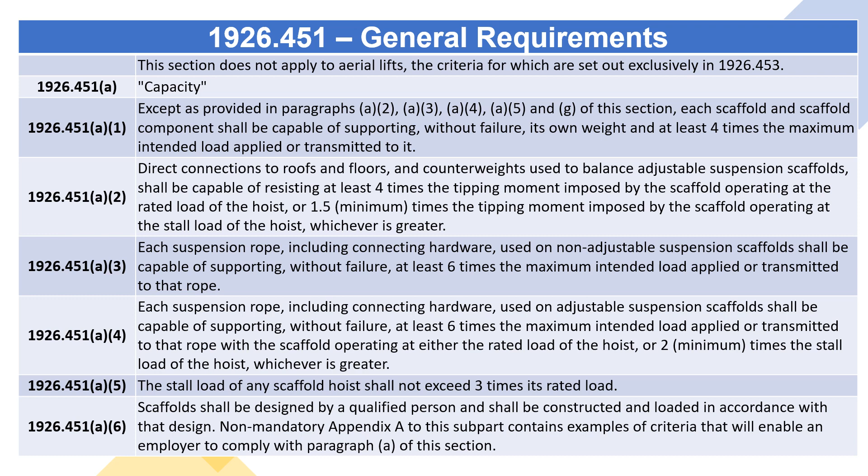1926.451 B. Scaffold platform construction. 1926.451 B1, each platform on all working levels of scaffolds shall be fully planked or decked between the front uprights and the guardrail supports as follows.

1926.451 B1 I, each platform unit, e.g., scaffold plank, fabricated deck, or fabricated platform, shall be installed so that the space between adjacent units and the space between the platform and the uprights is no more than 1 inch (2.5 centimeters) wide, except where the employer can demonstrate that a wider space is necessary, for example, to fit around uprights when side brackets are used to extend the width of the platform.

1926.451 B1 2, where the employer makes the demonstration provided for in paragraph B1 I of this section, the platform shall be planked or decked as fully as possible and the remaining open space between the platform and the upright shall not exceed 9.5 inches, 24.1 centimeters.

Exception to paragraph B1. The requirement in paragraph B1 to provide full planking or decking does not apply to platforms used solely as walkways or solely by employees performing scaffold erection or dismantling. In these situations, only the planking that the employer establishes is necessary to provide safe working conditions is required.

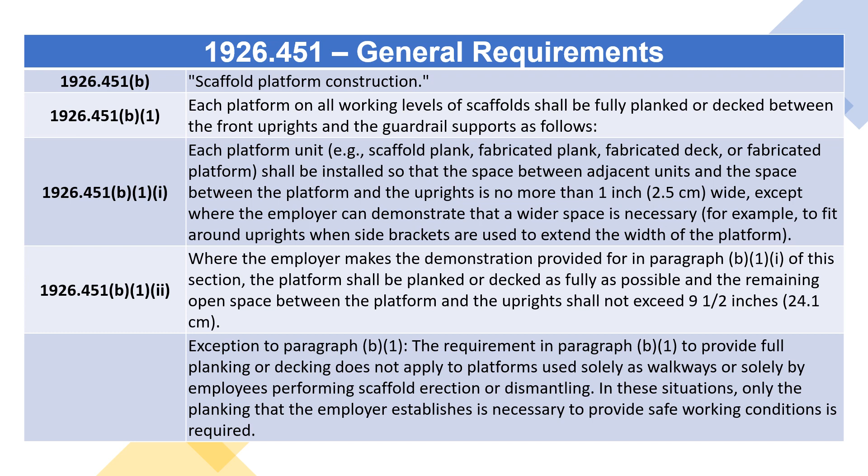1926.451 B2, except as provided in paragraphs B2 I and B2 2 of this section, each scaffold platform and walkway shall be at least 18 inches, 46 centimeters wide.

1926.451 B2 I, each ladder jack scaffold, top plate bracket scaffold, roof bracket scaffold, and pump jack scaffold shall be at least 12 inches, 30 centimeters wide. There is no minimum width requirement for boatswains' chairs.

Note to paragraph B2 I. Pursuant to an administrative stay effective November 29, 1996 and published in the Federal Register on November 25, 1996, the requirement in paragraph B2 I that roof bracket scaffolds be at least 12 inches wide is stayed until November 25, 1997 or until rulemaking regarding the minimum width of roof bracket scaffolds has been completed, whichever is later.

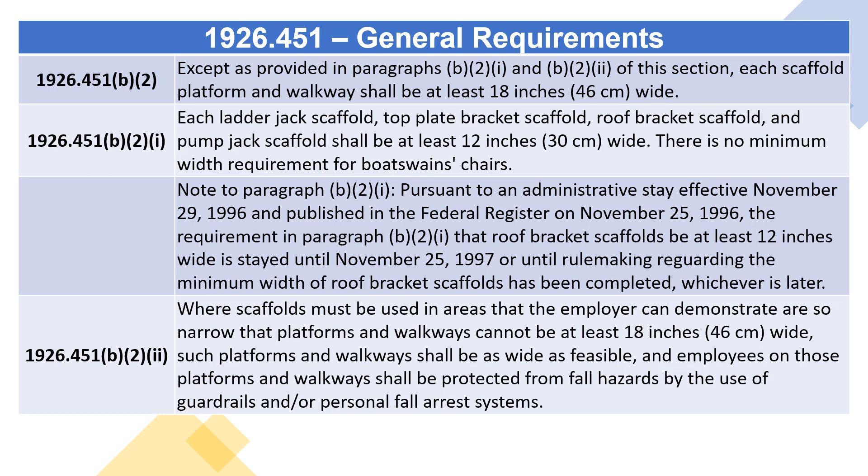1926.451 B2 2, where scaffolds must be used in areas that the employer can demonstrate are so narrow that platforms and walkways cannot be at least 18 inches, 46 centimeters wide, such platforms and walkways shall be as wide as feasible, and employees on those platforms and walkways shall be protected from fall hazards by the use of guardrails and/or personal fall arrest systems.

1926.451 B3, except as provided in paragraphs B3 I and 2 of this section, the front edge of all platforms shall not be more than 14 inches, 36 centimeters, from the face of the work, unless guardrail systems are erected along the front edge and/or personal fall arrest systems are used in accordance with paragraph G of this section to protect employees from falling.

1926.451 B3 I. The maximum distance from the face for outrigger scaffolds shall be 3 inches, 8 centimeters. 1926.451 B3 2. The maximum distance from the face for plastering and lathing operations shall be 18 inches, 46 centimeters.

1926.451(b)(4). Each end of a platform, unless cleated or otherwise restrained by hooks or equivalent means, shall extend over the centerline of its support at least 6 inches (15 centimeters).

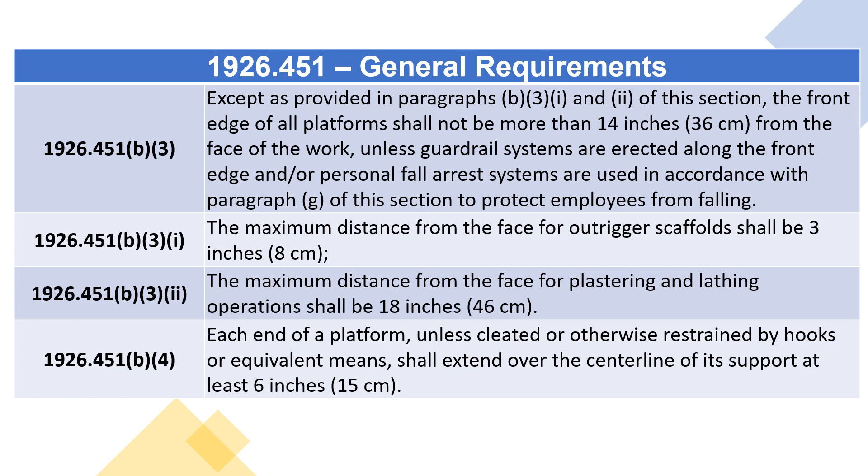1926.451(b)(5)(i). Each end of a platform 10 feet or less in length shall not extend over its support more than 12 inches (30 centimeters), unless the platform is designed and installed so that the cantilevered portion is able to support employees and/or materials without tipping, or has guardrails which block employee access to the cantilevered end.

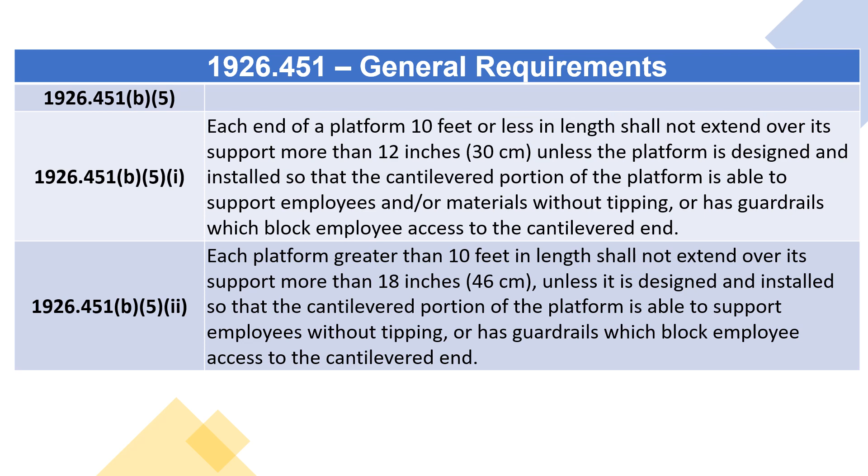1926.451(b)(5)(2). Each platform greater than 10 feet in length shall not extend over its support more than 18 inches (46 centimeters), unless it is designed and installed so that the cantilevered portion of the platform is able to support employees without tipping, or has guardrails which block employee access to the cantilevered end.

1926.451(b)(6). On scaffolds where scaffold planks are abutted to create a long platform, each abutted end shall rest on a separate support surface. This provision does not preclude the use of common support members, such as T-sections, to support abutting planks, or hook-on platforms designed to rest on common supports.

1926.451(b)(7). On scaffolds where platforms are overlapped to create a long platform, the overlap shall occur only over supports, and shall not be less than 12 inches (30 centimeters), unless the platforms are nailed together or otherwise restrained to prevent movement.

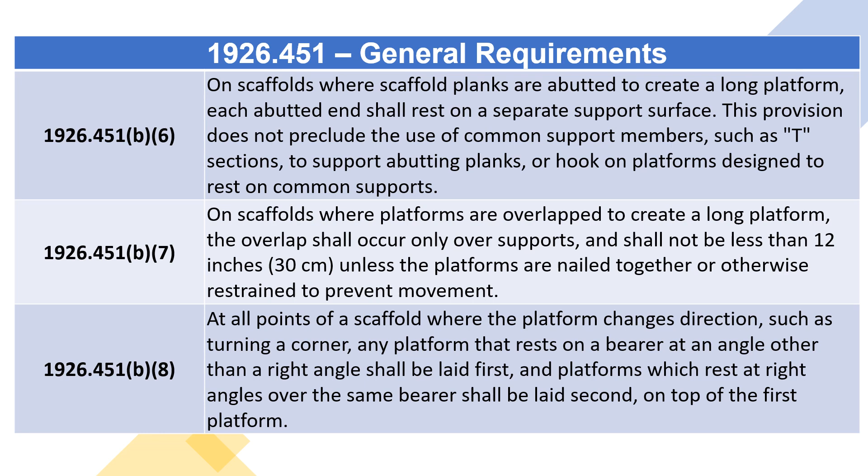1926.451(b)(8). At all points of a scaffold where the platform changes direction, such as turning a corner, any platform that rests on a bearer at an angle other than a right angle shall be laid first, and platforms which rest at right angles over the same bearer shall be laid second, on top of the first platform.

1926.451(b)(9). Wood platforms shall not be covered with opaque finishes, except that platform edges may be covered or marked for identification. Platforms may be coated periodically with wood preservatives, fire-retardant finishes, and slip-resistant finishes. However, the coating may not obscure the top or bottom wood surfaces.

1926.451(b)(10). Scaffold components manufactured by different manufacturers shall not be intermixed unless the components fit together without force and the scaffold's structural integrity is maintained by the user. Scaffold components manufactured by different manufacturers shall not be modified in order to intermix them unless a competent person determines the resulting scaffold is structurally sound.

1926.451(b)(11). Scaffold components made of dissimilar metals shall not be used together unless a competent person has determined that galvanic action will not reduce the strength of any component to a level below that required by paragraph (a)(1) of this section.

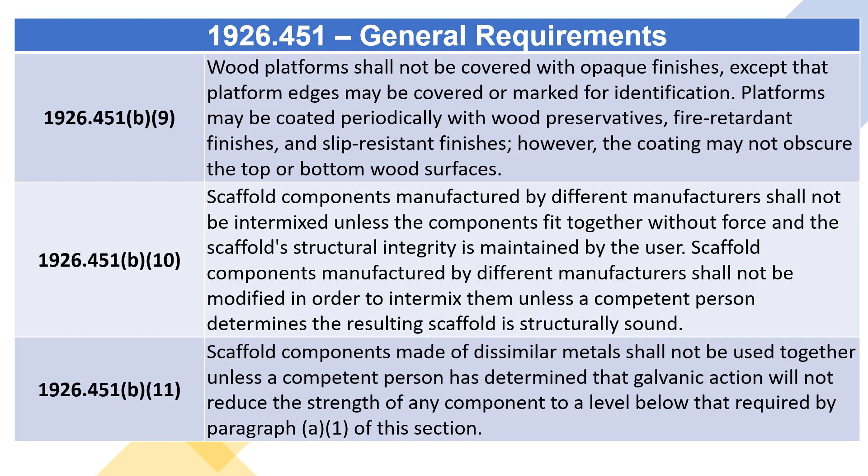1926.451(c). Criteria for supported scaffolds.

1926.451(c)(1). Supported scaffolds with a height to base width, including outrigger supports if used, ratio of more than 4:1, shall be restrained from tipping by guying, tying, bracing, or equivalent means, as follows.

1926.451(c)(1)(i). Guys, ties, and braces shall be installed at locations where horizontal members support both inner and outer legs.

1926.451(c)(1)(2). Guys, ties, and braces shall be installed according to the scaffold manufacturer's recommendations or at the closest horizontal member to the 4:1 height and be repeated vertically at locations of horizontal members every 20 feet (6.1 meters) or less thereafter for scaffolds 3 feet (0.91 meters) wide or less, and every 26 feet (7.9 meters) or less thereafter for scaffolds greater than 3 feet (0.91 meters) wide.

The top guy, tie, or brace of completed scaffolds shall be placed no further than the 4:1 height from the top. Such guys, ties and braces shall be installed at each end of the scaffold and at horizontal intervals not to exceed 30 feet (9.1 meters) measured from one end, not both, towards the other.

1926.451(c)(1)(3). Ties, guys, braces, or outriggers shall be used to prevent the tipping of supported scaffolds in all circumstances where an eccentric load, such as a cantilevered work platform, is applied or is transmitted to the scaffold.

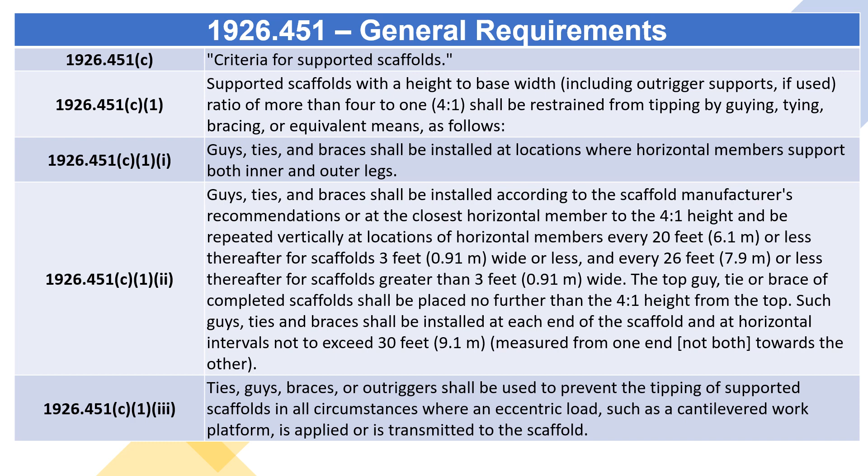1926.451(c)(2). Supported scaffold poles, legs, posts, frames, and uprights shall bear on base plates and mud sills or other adequate firm foundation.

1926.451(c)(2)(i). Footings shall be level, sound, rigid, and capable of supporting the loaded scaffold without settling or displacement.

1926.451(c)(2)(ii). Unstable objects shall not be used to support scaffolds or platform units.

1926.451(c)(2)(iii). Unstable objects shall not be used as working platforms.

1926.451(c)(2)(iv). Front-end loaders and similar pieces of equipment shall not be used to support scaffold platforms unless they have been specifically designed by the manufacturer for such use.

1926.451(c)(2)(v): Forklifts shall not be used to support scaffold platforms unless the entire platform is attached to the fork and the forklift is not moved horizontally while the platform is occupied.

1926.451(c)(3): Supported scaffold poles, legs, posts, frames, and uprights shall be plumb and braced to prevent swaying and displacement.

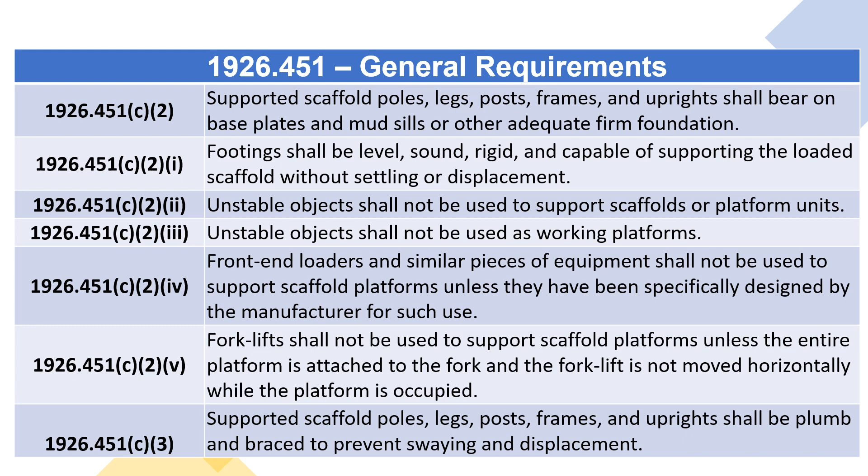1926.451(d): Criteria for suspension scaffolds. 1926.451(d)(1): All suspension scaffold support devices, such as outrigger beams, cornice hooks, parapet clamps, and similar devices, shall rest on surfaces capable of supporting at least 4 times the load imposed on them by the scaffold operating at the rated load of the hoist, or at least 1.5 times the load imposed on them by the scaffold at the stall capacity of the hoist, whichever is greater.

1926.451(d)(2): Suspension scaffold outrigger beams, when used, shall be made of structural metal or equivalent strength material, and shall be restrained to prevent movement.

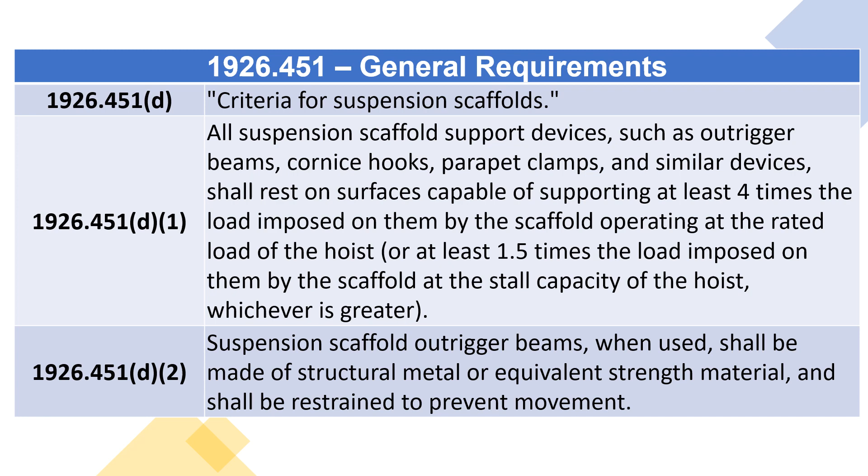1926.451(d)(3): The inboard ends of suspension scaffold outrigger beams shall be stabilized by bolts or other direct connections to the floor or roof deck, or they shall have their inboard ends stabilized by counterweights, except masons' multi-point adjustable suspension scaffold outrigger beams shall not be stabilized by counterweights.

1926.451(d)(3)(i): Before the scaffold is used, direct connections shall be evaluated by a competent person who shall confirm, based on the evaluation, that the supporting surfaces are capable of supporting the loads to be imposed. In addition, masons' multi-point adjustable suspension scaffold connections shall be designed by an engineer experienced in such scaffold design.

1926.451(d)(3)(ii): Counterweights shall be made of non-flowable material. Sand, gravel and similar materials that can be easily dislocated shall not be used as counterweights.

1926.451(d)(3)(iii): Only those items specifically designed as counterweights shall be used to counterweight scaffold systems. Construction materials such as, but not limited to, masonry units and rolls of roofing felt, shall not be used as counterweights.

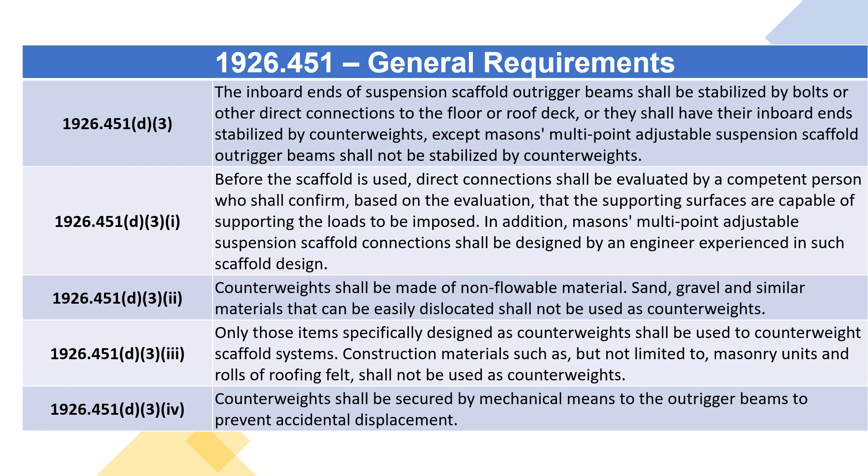1926.451(d)(3)(iv): Counterweights shall be secured by mechanical means to the outrigger beams to prevent accidental displacement.

1926.451(d)(3)(v): Counterweights shall not be removed from an outrigger beam until the scaffold is disassembled.

1926.451(d)(3)(vi): Outrigger beams which are not stabilized by bolts or other direct connections to the floor or roof deck shall be secured by tiebacks.

1926.451(d)(3)(vii): Tiebacks shall be equivalent in strength to the suspension ropes.

1926.451(d)(3)(viii): Outrigger beams shall be placed perpendicular to its bearing support, usually the face of the building or structure. However, where the employer can demonstrate that it is not possible to place an outrigger beam perpendicular to the face of the building or structure because of obstructions that cannot be moved, the outrigger beam may be placed at some other angle, provided opposing angle tiebacks are used.

1926.451(d)(3)(ix): Tiebacks shall be secured to a structurally sound anchorage on the building or structure. Sound anchorages include structural members, but do not include standpipes, vents, other piping systems, or electrical conduit.

1926.451(d)(3)(x): Tiebacks shall be installed perpendicular to the face of the building or structure, or opposing angle tiebacks shall be installed. Single tiebacks installed at an angle are prohibited.

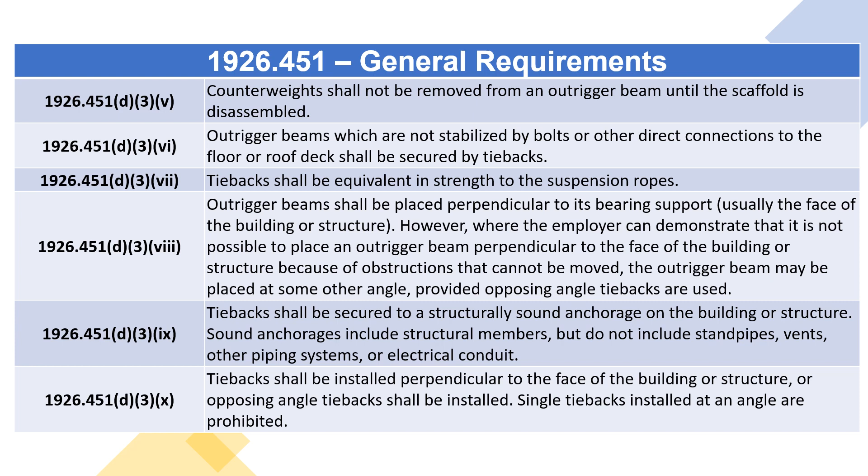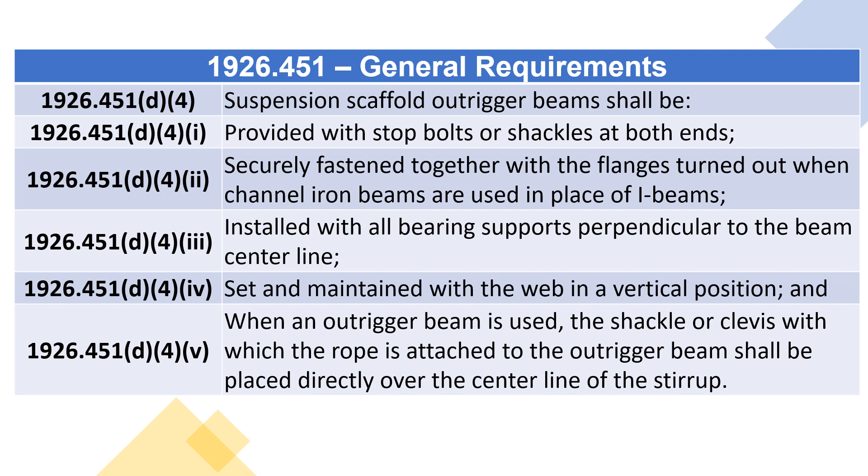1926.451(d)(4): Suspension scaffold outrigger beams shall be, per 1926.451(d)(4)(i) through (v), provided with stop bolts or shackles at both ends, securely fastened together with the flanges turned out when channel iron beams are used in place of I-beams. Installed with all bearing supports perpendicular to the beam center line, set and maintained with the web in a vertical position, and when an outrigger beam is used, the shackle or clevis with which the rope is attached to the outrigger beam shall be placed directly over the center line of the stirrup.

1926.451(d)(5): Suspension scaffold support devices such as cornice hooks, roof irons, parapet clamps, or similar devices shall be, per 1926.451(d)(5)(i) through (4), made of steel, wrought iron, or materials of equivalent strength, supported by bearing blocks, and secured against movement by tiebacks installed at right angles to the face of the building or structure, or opposing angle tiebacks shall be installed and secured to a structurally sound point of anchorage on the building or structure. Sound points of anchorage include structural members, but do not include standpipes, vents, other piping systems, or electrical conduit. Tieback shall be equivalent in strength to the hoisting rope.

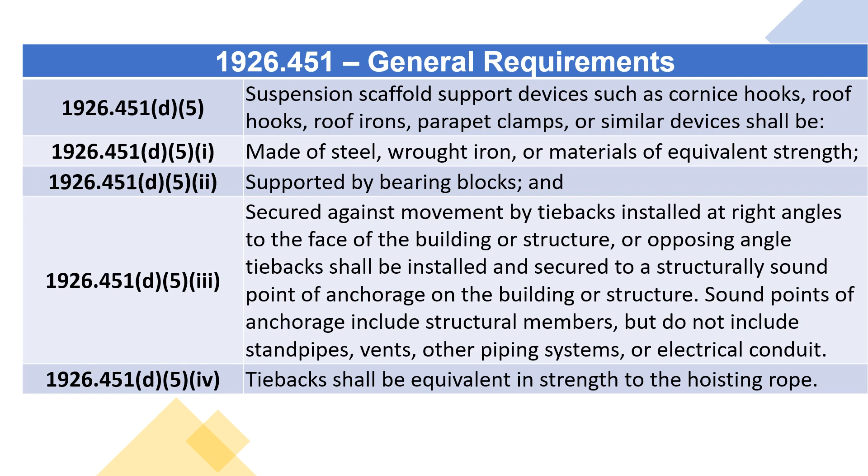1926.451(d)(6): When winding drum hoists are used on a suspension scaffold, they shall contain not less than 4 wraps of the suspension rope at the lowest point of scaffold travel. When other types of hoists are used, the suspension ropes shall be long enough to allow the scaffold to be lowered to the level below without the rope end passing through the hoist, or the rope end shall be configured or provided with means to prevent the end from passing through the hoist.

1926.451(d)(7): The use of repaired wire rope as suspension rope is prohibited. (d)(8): Wire suspension ropes shall not be joined together except through the use of eye-splice thimbles connected with shackles or cover plates and bolts.

1926.451(d)(9): The load end of wire suspension ropes shall be equipped with proper size thimbles and secured by eye-splicing or equivalent means.

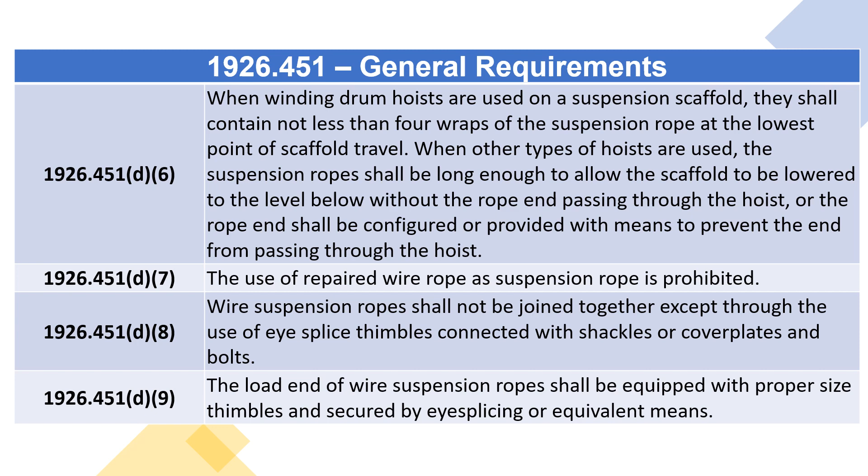1926.451(d)(10): Ropes shall be inspected for defects by a competent person prior to each workshift and after every occurrence which could affect a rope's integrity. Ropes shall be replaced if any of the following conditions exist, 1926.451(d)(10)(i) through (vi):

Any physical damage which impairs the function and strength of the rope. Kinks that might impair the tracking or wrapping of rope around the drum or sheaves.

Six randomly distributed broken wires in one rope lay, or three broken wires in one strand in one rope lay. Abrasion, corrosion, scrubbing, flattening, or peening causing loss of more than one-third of the original diameter of the outside wires.

Heat damage caused by a torch or any damage caused by contact with electrical wires. Evidence that the secondary brake has been activated during an overspeed condition and has engaged the suspension rope.

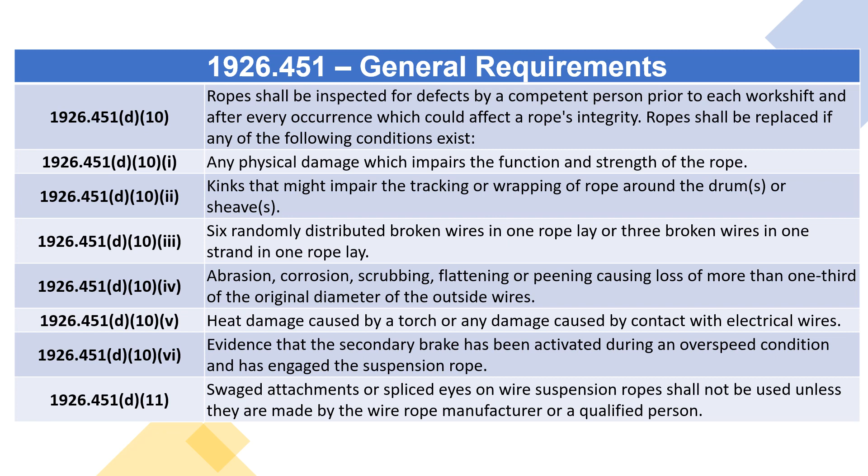1926.451(d)(11): Swaged attachments or spliced eyes on wire suspension ropes shall not be used unless they are made by the wire rope manufacturer or a qualified person.

1926.451(d)(12): When wire rope clips are used on suspension scaffolds, 1926.451(d)(12)(i) through (vi): There shall be a minimum of three wire rope clips installed, with the clips a minimum of six rope diameters apart. Clips shall be installed according to the manufacturer's recommendations.

Clips shall be retightened to the manufacturer's recommendations after the initial loading. Clips shall be inspected and retightened to the manufacturer's recommendations at the start of each workshift thereafter.

U-bolt clips shall not be used at the point of suspension for any scaffold hoist. When U-bolt clips are used, the U-bolt shall be placed over the dead end of the rope, and the saddle shall be placed over the live end of the rope.

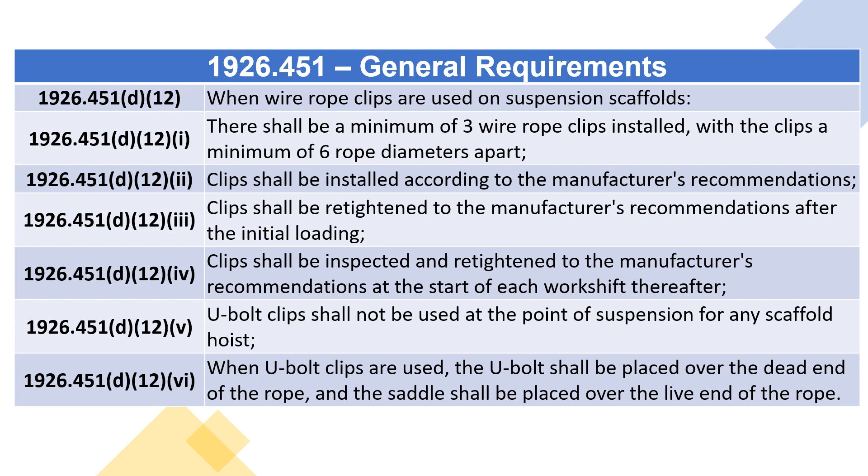1926.451(d)(13): Suspension scaffold power-operated hoists and manual hoists shall be tested by a qualified testing laboratory.

1926.451(d)(14): Gasoline-powered equipment and hoists shall not be used on suspension scaffolds.

1926.451(d)(15): Gears and brakes of power-operated hoists used on suspension scaffolds shall be enclosed.

1926.451(d)(16): In addition to the normal operating brake, suspension scaffold power-operated hoists and manually operated hoists shall have a braking device or locking pawl which engages automatically when a hoist makes either of the following uncontrolled movements: an instantaneous change in momentum, or an accelerated overspeed.

1926.451(d)(17): Manually operated hoists shall require a positive crank force to descend.

1926.451(d)(18): Two-point and multi-point suspension scaffolds shall be tied or otherwise secured to prevent them from swaying, as determined to be necessary based on an evaluation by a competent person. Window cleaners' anchors shall not be used for this purpose.

1926.451(d)(19): Devices whose sole function is to provide emergency escape and rescue shall not be used as working platforms. This provision does not preclude the use of systems which are designed to function both as suspension scaffolds and emergency systems.

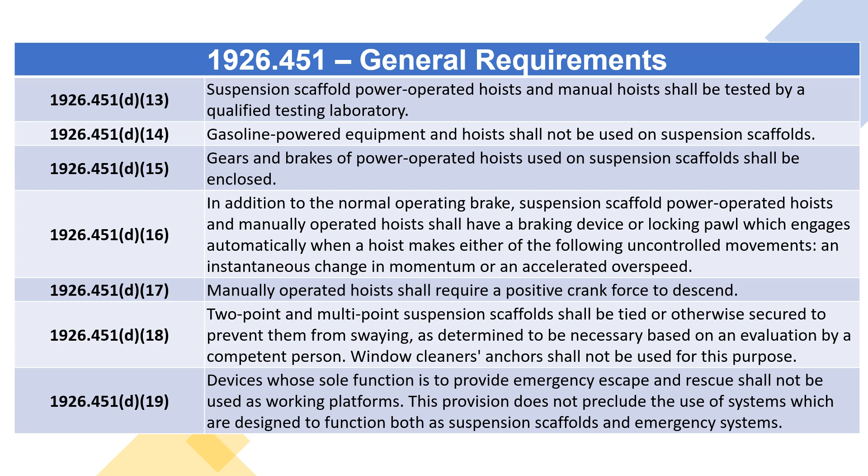1926.451(e): Access. This paragraph applies to scaffold access for all employees. Access requirements for employees erecting or dismantling supported scaffolds are specifically addressed in paragraph (e)(9) of this section.

1926.451(e)(1): When scaffold platforms are more than 2 feet (0.6 meters) above or below a point of access, portable ladders, hook-on ladders, attachable ladders, stair towers, scaffold stairways/towers, stairway-type ladders such as ladder stands, ramps, walkways, integral prefabricated scaffold access, or direct access from another scaffold, structure, personnel hoist, or similar surface shall be used.

Crossbraces shall not be used as a means of access.

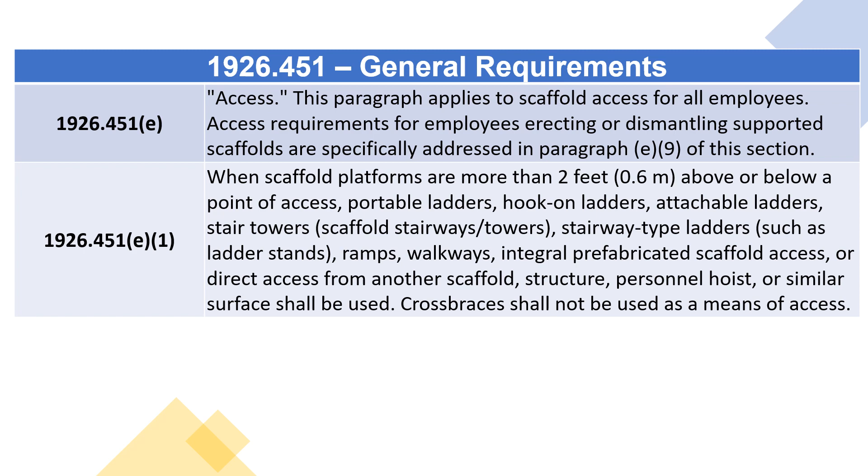1926.451(e)(2): Portable, hook-on, and attachable ladders. Additional requirements for the proper construction and use of portable ladders are contained in Subpart X of this part, Stairways and Ladders.

1926.451(e)(2)(i) through (e)(2)(vi): Portable, hook-on, and attachable ladders shall be positioned so as not to tip the scaffold. Hook-on and attachable ladders shall be positioned so that their bottom rung is not more than 24 inches (61 centimeters) above the scaffold supporting level.

When hook-on and attachable ladders are used on a supported scaffold more than 35 feet (10.7 meters) high, they shall have rest platforms at 35 foot (10.7 meter) maximum vertical intervals.

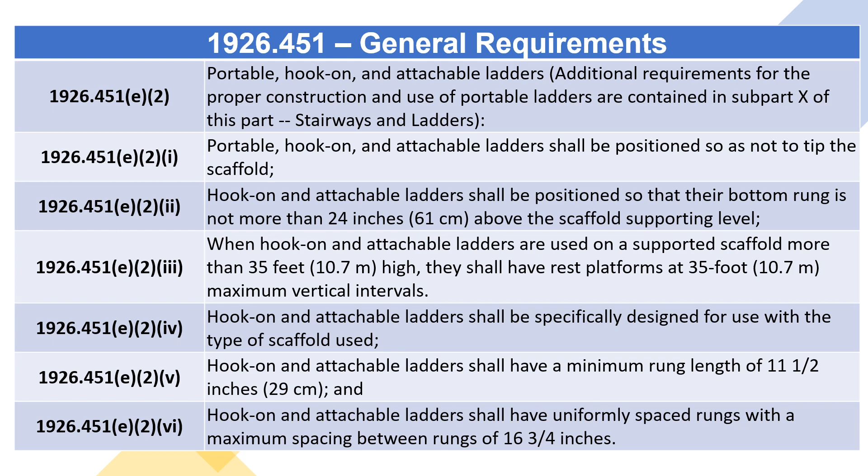Hook-on and attachable ladders shall be specifically designed for use with the type of scaffold used. They shall have a minimum rung length of 11.5 inches (29 centimeters), and hook-on and attachable ladders shall have uniformly spaced rungs with a maximum spacing between rungs of 16 3/4 inches.

1926.451(e)(3). Stairway-type ladders shall be positioned such that their bottom step is not more than 24 inches (61 centimeters) above the scaffold supporting level.

They shall be provided with rest platforms at 12 foot (3.7 m) maximum vertical intervals, have a minimum step width of 16 inches (41 centimeters), except that mobile scaffold stairway-type ladders shall have a minimum step width of 11.5 inches (30 centimeters), and have slip-resistant treads on all steps and landings.

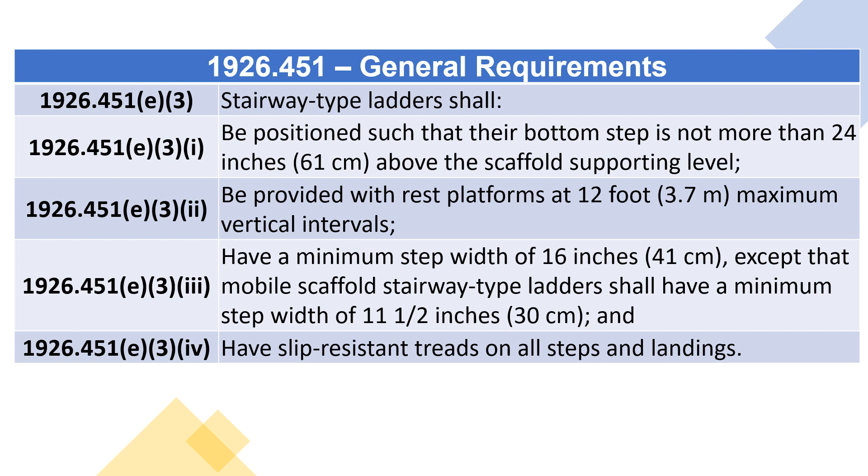1926.451(e)(4). Stair towers, scaffold stairway/towers, shall be positioned such that their bottom step is not more than 24 inches (61 centimeters) above the scaffold supporting level.

1926.451(e)(4)(i) through (v). A stair rail consisting of a top rail and a mid rail shall be provided on each side of each scaffold stairway.

The top rail of each stair rail system shall also be capable of serving as a handrail, unless a separate handrail is provided. Handrails and top rails that serve as handrails shall provide an adequate handhold for employees grasping them to avoid falling.

Stair rail systems and handrails shall be surfaced to prevent injury to employees from punctures or lacerations, and to prevent snagging of clothing.

The ends of stair rail systems and handrails shall be constructed so that they do not constitute a projection hazard.

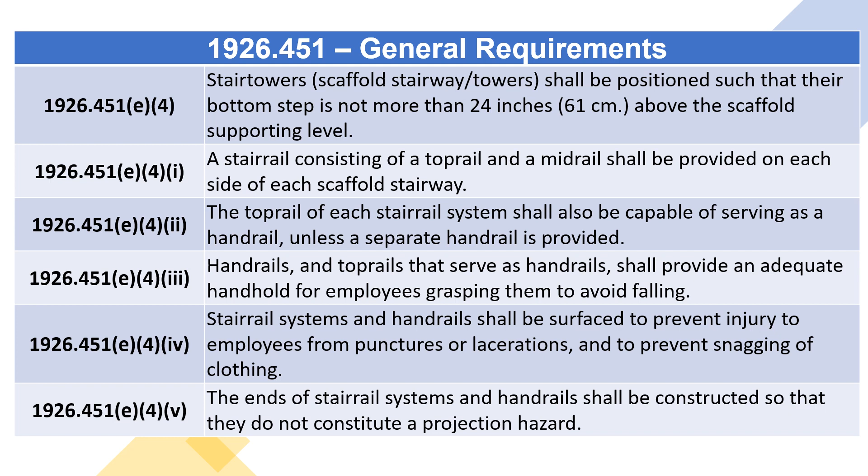1926.451(e)(4)(vi) through (x). Handrails and top rails that are used as handrails shall be at least 3 inches (7.6 centimeters) from other objects.

Stair rails shall be not less than 28 inches (71 centimeters) nor more than 37 inches (94 centimeters) from the upper surface of the stair rail to the surface of the tread, in line with the face of the riser at the forward edge of the tread.

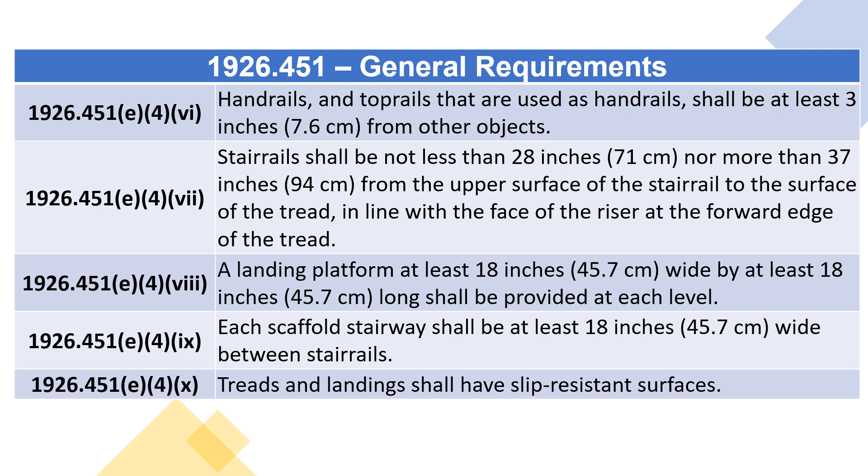A landing platform at least 18 inches (45.7 centimeters) wide by at least 18 inches (45.7 centimeters) long shall be provided at each level. Each scaffold stairway shall be at least 18 inches (45.7 centimeters) wide between stair rails. Treads and landings shall have slip-resistant surfaces.

1926.451(e)(4)(xi) through (xiv). Stairways shall be installed between 40 degrees and 60 degrees from the horizontal.

Guardrails meeting the requirements of paragraph (g)(4) of this section shall be provided on the open sides and ends of each landing. Riser height shall be uniform, within a quarter inch (0.6 centimeters) for each flight of stairs.

Greater variations in riser height are allowed for the top and bottom steps of the entire system, not for each flight of stairs. Tread depth shall be uniform, within a quarter inch, for each flight of stairs.

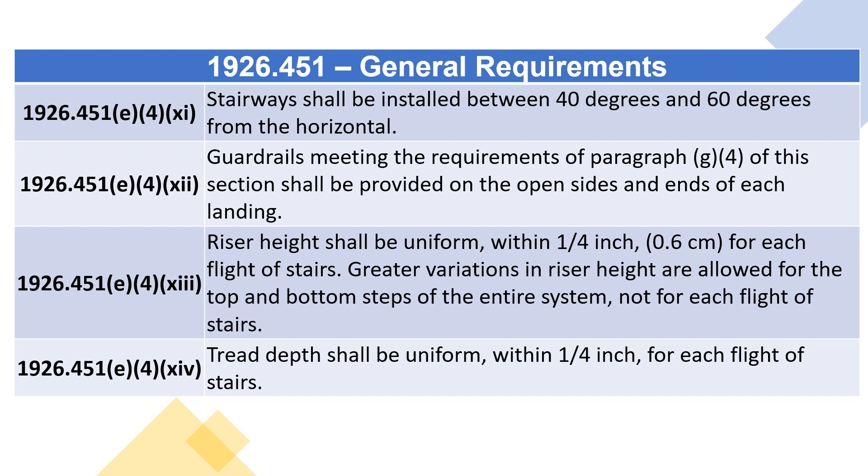1926.451(e)(5). Ramps and walkways. 1926.451(e)(5)(i) through (iii). Ramps and walkways 6 feet (1.8 meters) or more above lower levels shall have guardrail systems which comply with subpart M of this part, fall protection.

No ramp or walkway shall be inclined more than a slope of 1 vertical to 3 horizontal, 20 degrees above the horizontal. If the slope of a ramp or walkway is steeper than 1 vertical to 8 horizontal, the ramp or walkway shall have cleats not more than 14 inches (35 centimeters) apart which are securely fastened to the planks to provide footing.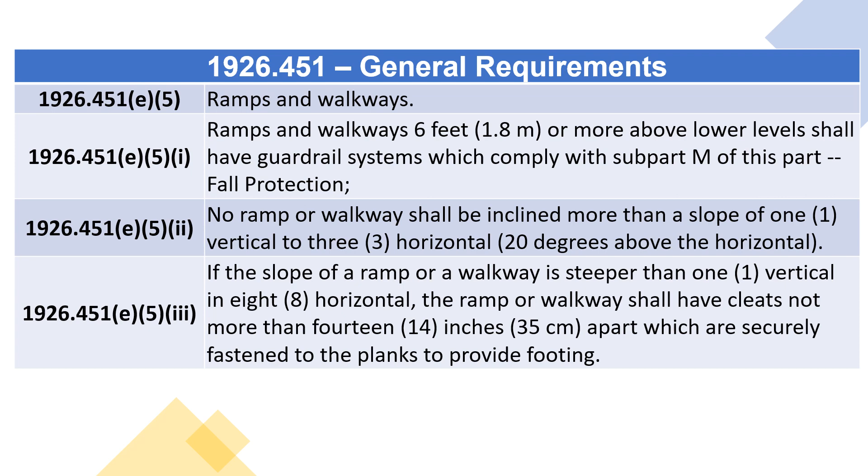1926.451(e)(6). Integral prefabricated scaffold access frames shall: 1926.451(e)(6)(i) through (vi). Be specifically designed and constructed for use as ladder rungs, have a rung length of at least 8 inches (20 centimeters).

Not be used as work platforms when rungs are less than 11.5 inches in length, unless each affected employee uses fall protection or a positioning device which complies with 1926.502.

Be uniformly spaced within each frame section, be provided with rest platforms at 35 foot (10.7 m) maximum vertical intervals on all supported scaffolds more than 35 feet (10.7 meters) high, and have a maximum spacing between rungs of 16 3/4 inches (43 centimeters).

Non-uniform rung spacing caused by joining end frames together is allowed, provided the resulting spacing does not exceed 16 3/4 inches (43 centimeters).

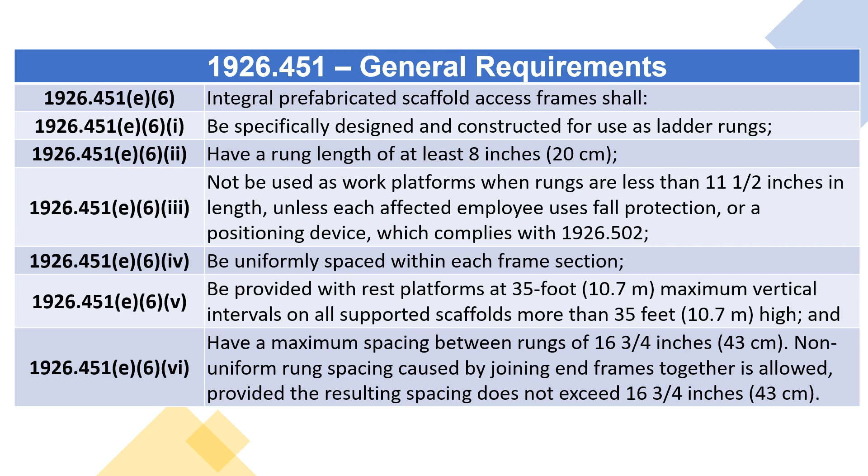1926.451(e)(7). Steps and rungs of ladder and stairway type access shall line up vertically with each other between rest platforms.

1926.451(e)(8). Direct access to or from another surface shall be used only when the scaffold is not more than 14 inches (36 centimeters) horizontally and not more than 24 inches (61 centimeters) vertically from the other surface.

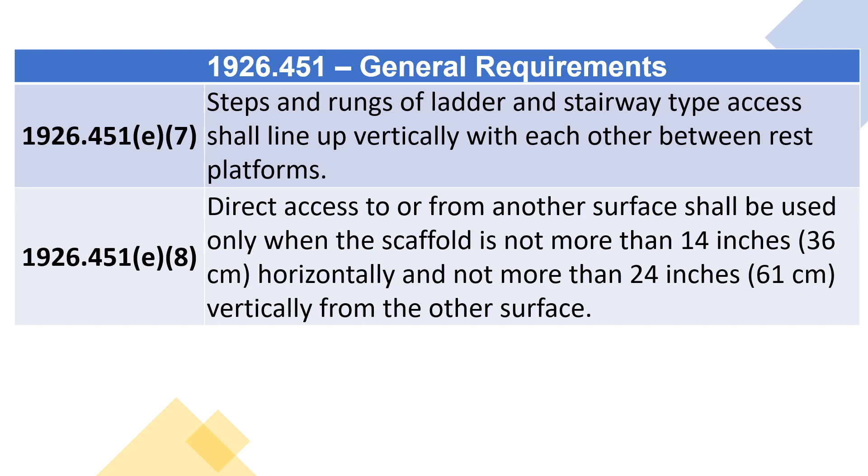1926.451(e)(9). Effective September 2, 1997, access for employees erecting or dismantling supported scaffolds shall be in accordance with the following.

1926.451 E9 1 through 1926.451 E9 4: The employer shall provide safe means of access for each employee erecting or dismantling a scaffold where the provision of safe access is feasible and does not create a greater hazard. The employer shall have a competent person determine whether it is feasible or would pose a greater hazard to provide, and have employees use, a safe means of access. This determination shall be based on site conditions and the type of scaffold being erected or dismantled.

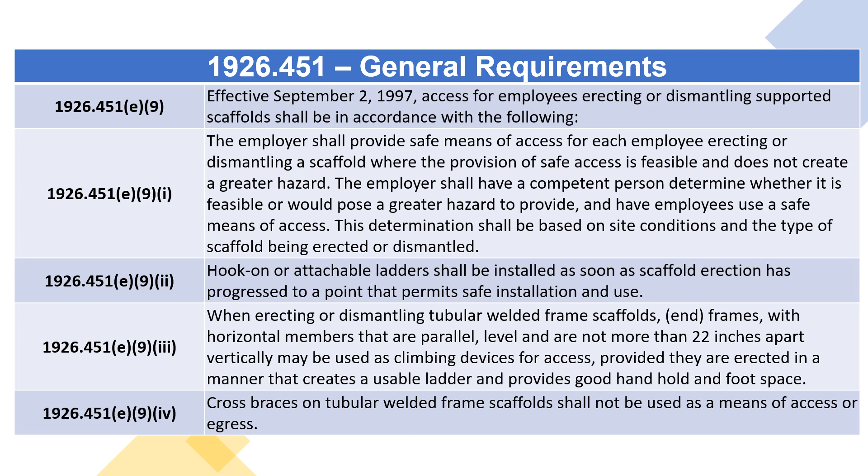Hook-on or attachable ladders shall be installed as soon as scaffold erection has progressed to a point that permits safe installation and use. When erecting or dismantling tubular welded frame scaffolds, end frames with horizontal members that are parallel, level, and not more than 22 inches apart vertically may be used as climbing devices for access, provided they are erected in a manner that creates a usable ladder and provides good hand-hold and foot space. Cross-braces on tubular welded frame scaffolds shall not be used as a means of access or egress.

1926.451, F. Use. 1926.451, F.1. Scaffolds and scaffold components shall not be loaded in excess of their maximum intended loads or rated capacities, whichever is less.

1926.451, F.2. The use of shore or lean-to scaffolds is prohibited.

1926.451, F.3. Scaffolds and scaffold components shall be inspected for visible defects by a competent person before each work shift, and after any occurrence which could affect a scaffold's structural integrity.

1926.451, F.4. Any part of a scaffold damaged or weakened such that its strength is less than that required by paragraph A of this section shall be immediately repaired or replaced, braced to meet those provisions, or removed from service until repaired.

1926.451, F.5. Scaffolds shall not be moved horizontally while employees are on them, unless they have been designed by a registered professional engineer specifically for such movement or, for mobile scaffolds, where the provisions of 1926.452, W, are followed.

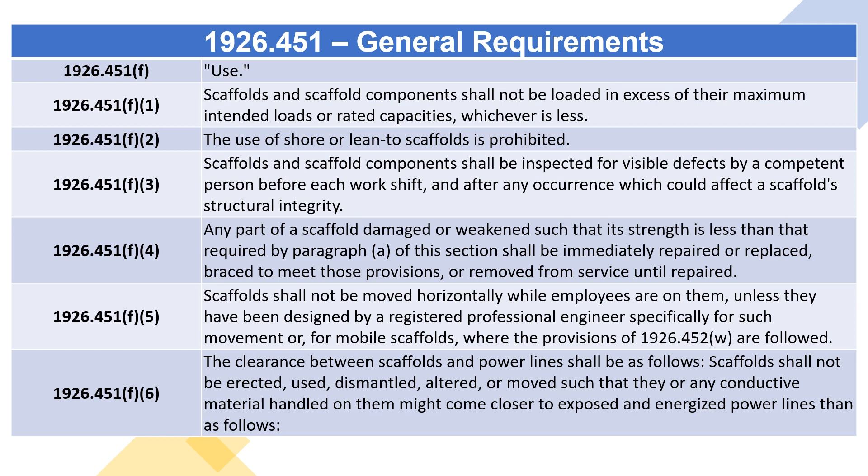1926.451, F.6. The clearance between scaffolds and power lines shall be as follows. Scaffolds shall not be erected, used, dismantled, altered, or moved such that they or any conductive material handled on them might come closer to exposed and energized power lines than as follows.

For insulated lines less than 300 volts, stay a minimum of 3 feet, or 0.9 meters. For insulated lines 300 volts to 50 kV, stay a minimum of 10 feet, or 3.1 meters. For insulated lines more than 50 kV, stay a minimum of 10 feet, or 3.1 meters, plus 0.4 inches, 1 centimeter, for each 1 kV over 50 kV. An alternative is 2 times the length of the line insulator, but never less than 10 feet, 3.1 meters.

For uninsulated lines less than 50 kV, stay a minimum of 10 feet, or 3.1 meters. For uninsulated lines more than 50 kV, stay a minimum of 10 feet, or 3.1 meters, plus 0.4 inches, 1 centimeter, for each 1 kV over 50 kV. An alternative is 2 times the length of the line insulator, but never less than 10 feet, 3.1 meters.

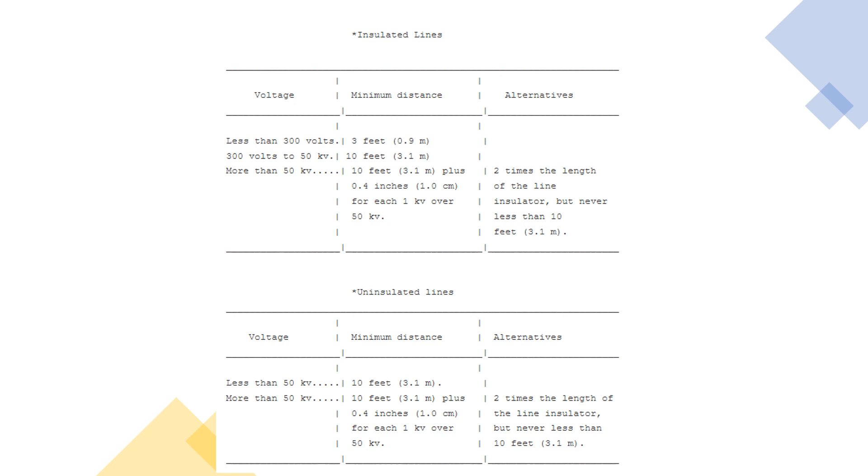1926.451, F.7. Scaffolds shall be erected, moved, dismantled, or altered only under the supervision and direction of a competent person qualified in scaffold erection, moving, dismantling, or alteration. Such activities shall be performed only by experienced and trained employees selected for such work by the competent person.

1926.451, F.8. Employees shall be prohibited from working on scaffolds covered with snow, ice, or other slippery material except as necessary for removal of such materials.

1926.451, F.9. Where swinging loads are being hoisted onto or near scaffolds such that the loads might contact the scaffold, tag lines or equivalent measures to control the loads shall be used.

1926.451, F.10. Suspension ropes supporting adjustable suspension scaffolds shall be of a diameter large enough to provide sufficient surface area for the functioning of brake and hoist mechanisms.

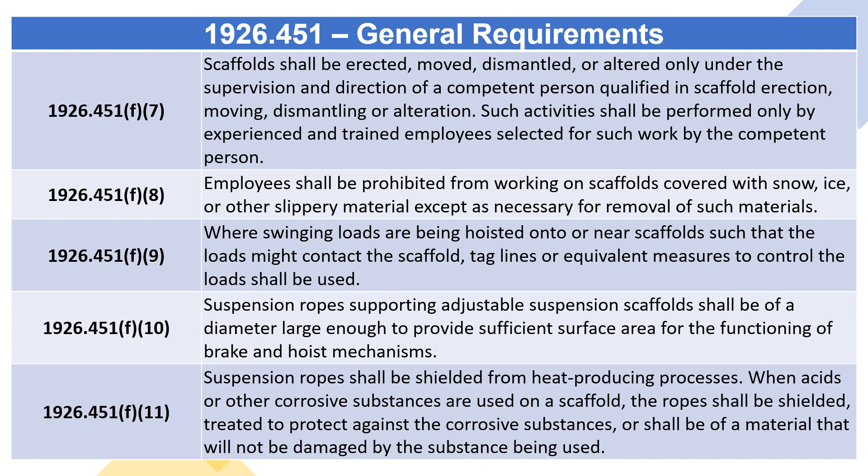1926.451, F.11. Suspension ropes shall be shielded from heat-producing processes. When acids or other corrosive substances are used on a scaffold, the rope shall be shielded, treated to protect against the corrosive substances, or shall be of a material that will not be damaged by the substance being used.

1926.451, F.12. Work on or from scaffolds is prohibited during storms or high winds unless a competent person has determined that it is safe for employees to be on the scaffold and those employees are protected by a personal fall arrest system or windscreens. Windscreens shall not be used unless the scaffold is secured against the anticipated wind forces imposed.

1926.451, F.13. Debris shall not be allowed to accumulate on platforms.

1926.451, F.14. Makeshift devices, such as but not limited to boxes and barrels, shall not be used on top of scaffold platforms to increase the working level height of employees.

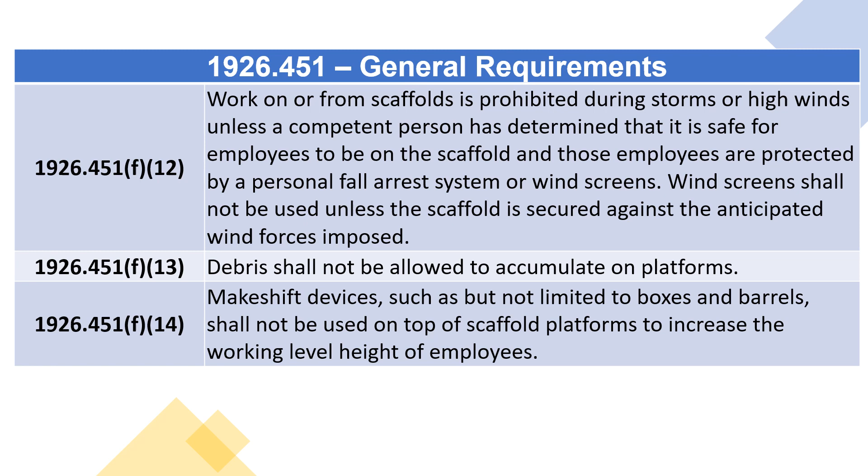1926.451 F15. Ladders shall not be used on scaffolds to increase the working level height of employees, except on large area scaffolds where employers have satisfied the following criteria, 1926.451 F15 I through F15 4.

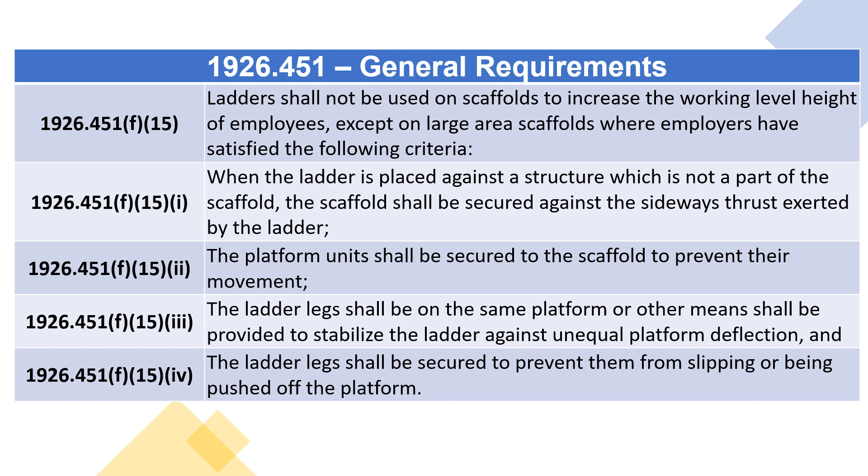When the ladder is placed against a structure which is not part of the scaffold, the scaffold shall be secured against the sideways thrust exerted by the ladder. The platform units shall be secured to the scaffold to prevent their movement. The ladder legs shall be on the same platform, or other means shall be provided to stabilize the ladder against unequal platform deflection, and the ladder legs shall be secured to prevent them from slipping or being pushed off the platform.

1926.451 F16. Platforms shall not deflect more than 1/60th of the span when loaded.

1926.451 F17. To reduce the possibility of welding current arcing through the suspension wire rope when performing welding from suspended scaffolds, the following precautions shall be taken, as applicable. F17 I: an insulated thimble shall be used to attach each suspension wire rope to its hanging support, such as cornice hook or outrigger. Excess suspension wire rope and any additional independent lines from grounding shall be insulated.

1926.451 F17 2. The suspension wire rope shall be covered with insulating material extending at least 4 feet (1.2 meters) above the hoist. If there is a tail line below the hoist, it shall be insulated to prevent contact with the platform. The portion of the tail line that hangs free below the scaffold shall be guided or retained, or both, so that it does not become grounded.

1926.451 F17 3. Each hoist shall be covered with insulated protective covers.

1926.451 F17 4. In addition to a work lead attachment required by the welding process, a grounding conductor shall be connected from the scaffold to the structure. The size of this conductor shall be at least the size of the welding process work lead, and this conductor shall not be in series with the welding process or the workpiece.

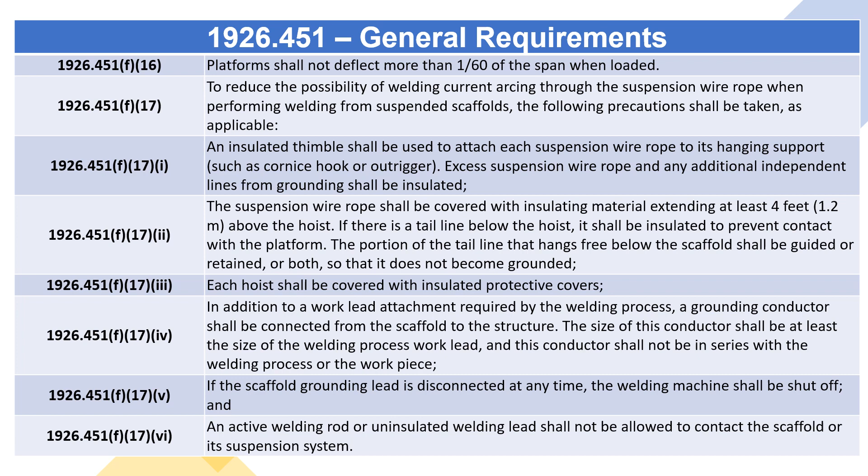1926.451 F17 V. If the scaffold grounding lead is disconnected at any time, the welding machine shall be shut off, and F17 6, an active welding rod or uninsulated welding lead shall not be allowed to contact the scaffold or its suspension system.

1926.451 G. Fall protection. 1926.451 G1. Each employee on a scaffold more than 10 feet (3.1 meters) above a lower level shall be protected from falling to that lower level.

Paragraphs G1 I through 7 of this section establish the types of fall protection to be provided to employees on each type of scaffold. Paragraph G2 addresses fall protection for scaffold erectors and dismantlers. Note to paragraph G1: the fall protection requirements for employees installing suspension scaffold support systems on floors, roofs, and other elevated surfaces are set forth in Subpart M of this part.

1926.451 G1 I through G1 3. Each employee on a boatswains' chair, catenary scaffold, float scaffold, needle beam scaffold, or ladder jack scaffold shall be protected by a personal fall arrest system.

Each employee on a single-point or two-point adjustable suspension scaffold shall be protected by both a personal fall arrest system and guardrail system. Each employee on a crawling board (chicken ladder) shall be protected by a personal fall arrest system, a guardrail system with minimum 200-pound top rail capacity, or by a 3/4 inch (1.9 centimeters) diameter grab line or equivalent handhold securely fastened beside each crawling board.

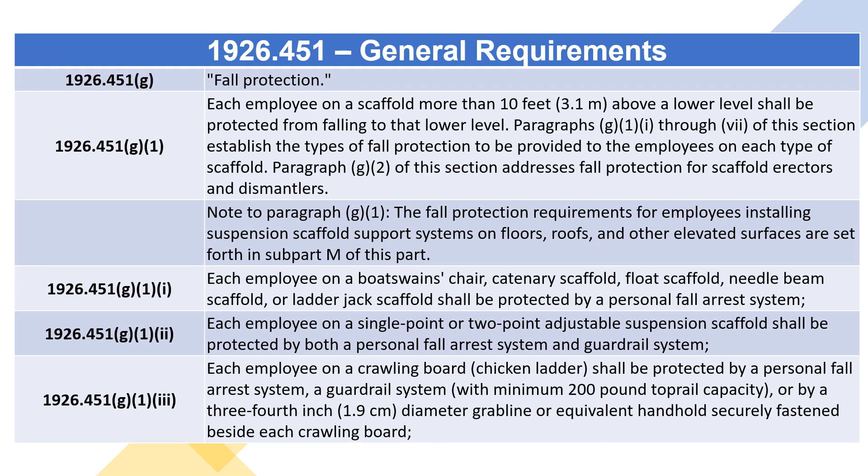1926.451 G1 4 through G1 7. Each employee on a self-contained adjustable scaffold shall be protected by a guardrail system, with minimum 200-pound top rail capacity, when the platform is supported by the frame structure, and by both a personal fall arrest system and a guardrail system, with minimum 200-pound top rail capacity, when the platform is supported by ropes.

Each employee on a walkway located within a scaffold shall be protected by a guardrail system, with minimum 200-pound top rail capacity, installed within 9.5 inches (24.1 centimeters) of and along at least one side of the walkway.

Each employee performing overhand bricklaying operations from a supported scaffold shall be protected from falling from all open sides and ends of the scaffold, except at the side next to the wall being laid, by the use of a personal fall arrest system or guardrail system, with minimum 200-pound top rail capacity.

For all scaffolds not otherwise specified in paragraphs G1 I through G1-6 of this section, each employee shall be protected by the use of personal fall arrest systems or guardrail systems meeting the requirements of paragraph G4 of this section.

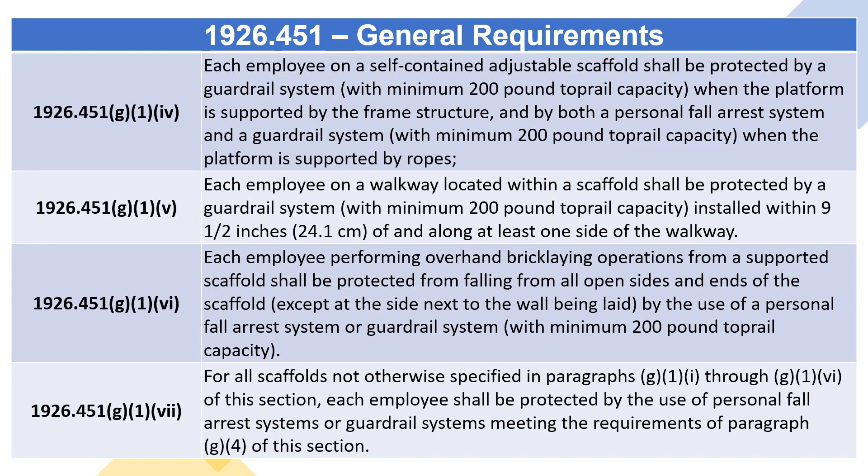1926.451(g)(2). Effective September 2, 1997, the employer shall have a competent person determine the feasibility and safety of providing fall protection for employees erecting or dismantling supported scaffolds. Employers are required to provide fall protection for employees erecting or dismantling supported scaffolds where the installation and use of such protection is feasible and does not create a greater hazard.

1926.451(g)(3). In addition to meeting the requirements of 1926.502(d), personal fall arrest systems used on scaffolds shall be attached by lanyard to a vertical lifeline, horizontal lifeline, or scaffold structural member. Vertical lifelines shall not be used when overhead components, such as overhead protection or additional platform levels, are part of a single-point or two-point adjustable suspension scaffold.

1926.451(g)(3)(i) through (g)(3)(iv). When vertical lifelines are used, they shall be fastened to a fixed safe point of anchorage, shall be independent of the scaffold, and shall be protected from sharp edges and abrasion. Safe points of anchorage include structural members of buildings, but do not include standpipes, vents, other piping systems, electrical conduit, outrigger beams, or counterweights.

When horizontal lifelines are used, they shall be secured to two or more structural members of the scaffold, or they may be looped around both suspension and independent suspension lines, on scaffolds so equipped, above the hoist and brake attached to the end of the scaffold. Horizontal lifelines shall not be attached only to the suspension ropes.

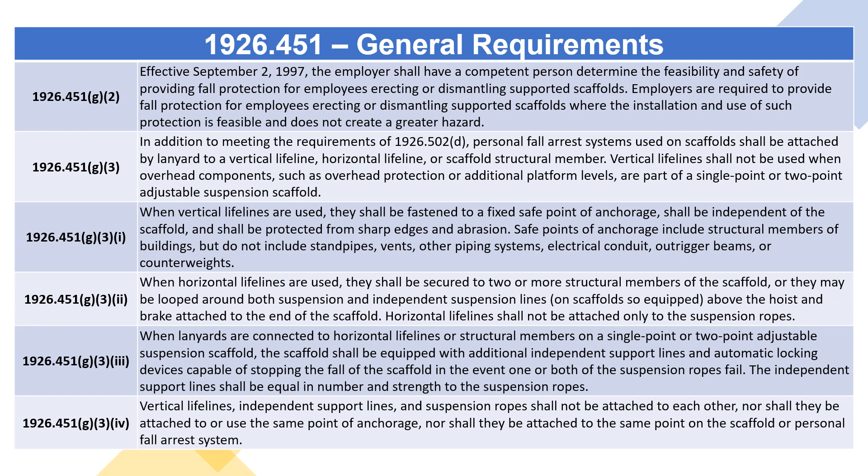1926.451(g)(4). Guardrail systems installed to meet the requirements of this section shall comply with the following provisions. Guardrail systems built in accordance with Appendix A to this subpart will be deemed to meet the requirements of paragraphs (g)(4)(7), (8), and (9) of this section.

1926.451(g)(4)(i) through (g)(4)(iv). Guardrail systems shall be installed along all open sides and ends of platforms. Guardrail systems shall be installed before the scaffold is released for use by employees other than erection/dismantling crews.

The top edge height of top rails or equivalent member on supported scaffolds manufactured or placed in service after January 1, 2000 shall be installed between 38 inches (0.97 meters) and 45 inches (1.2 meters) above the platform surface. The top edge height on supported scaffolds manufactured and placed in service before January 1, 2000, and on all suspended scaffolds where both a guardrail and a personal fall arrest system are required shall be between 36 inches (0.9 meters) and 45 inches (1.2 meters).

When conditions warrant, the height of the top edge may exceed the 45-inch height, provided the guardrail system meets all other criteria of paragraph (g)(4). When mid-rails, screens, mesh, intermediate vertical members, solid panels, or equivalent structural members are used, they shall be installed between the top edge of the guardrail system and the scaffold platform. When mid-rails are used, they shall be installed at a height approximately midway between the top edge of the guardrail system and the platform surface.

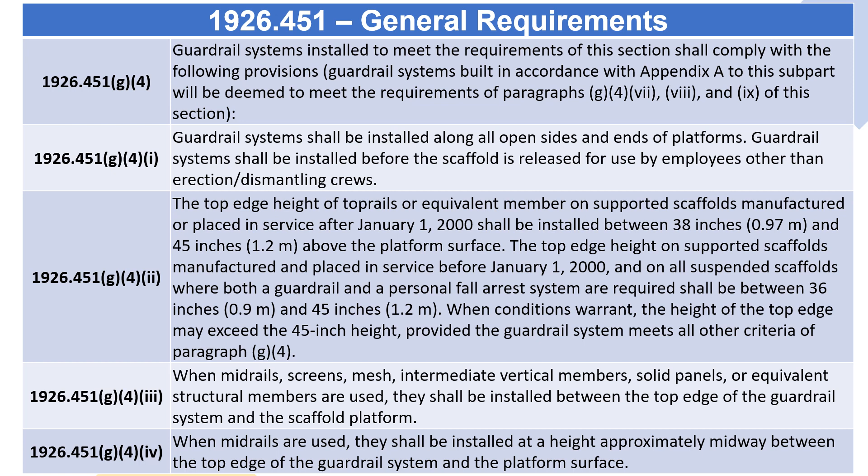1926.451(g)(4)(v) through (g)(4)(ix). When screens and mesh are used, they shall extend from the top edge of the guardrail system to the scaffold platform, and along the entire opening between the supports. When intermediate members, such as balusters or additional rails, are used, they shall not be more than 19 inches (48 centimeters) apart.

Each top rail or equivalent member of a guardrail system shall be capable of withstanding, without failure, a force applied in any downward or horizontal direction at any point along its top edge of at least 100 pounds (445 N) for guardrail systems installed on single-point adjustable suspension scaffolds or two-point adjustable suspension scaffolds, and at least 200 pounds (890 N) for guardrail systems installed on all other scaffolds.

When the loads specified in paragraph (g)(4)(vii) of this section are applied in a downward direction, the top edge shall not drop below the height above the platform surface that is prescribed in paragraph (g)(4)(ii) of this section.

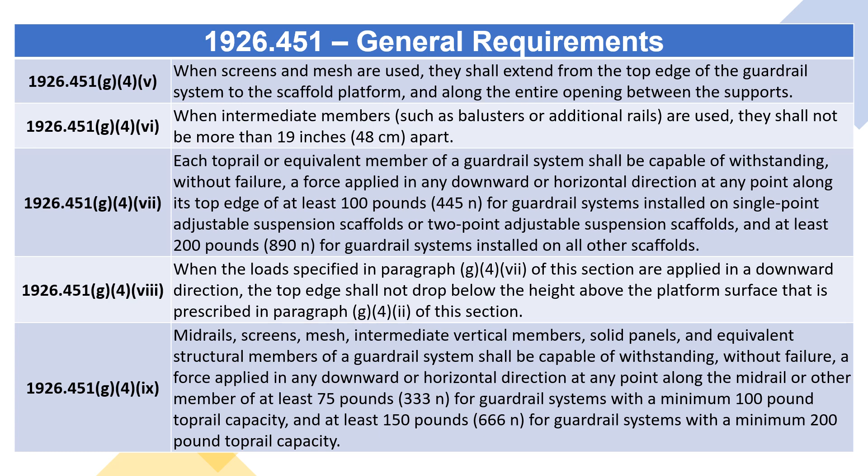Midrails, screens, mesh, intermediate vertical members, solid panels, and equivalent structural members of a guardrail system shall be capable of withstanding, without failure, a force applied in any downward or horizontal direction at any point along the midrail or other member of at least 75 pounds (333 N) for guardrail systems with a minimum 100-pound top rail capacity, and at least 150 pounds (666 N) for guardrail systems with a minimum 200-pound top rail capacity.

1926.451(g)(4)(x): Suspension scaffold hoists and non-walk-through stirrups may be used as end guardrails if the space between the hoist or stirrup and the side guardrail or structure does not allow passage of an employee to the end of the scaffold.

1926.451(g)(4)(xi) through (xv): Guardrails shall be surfaced to prevent injury to an employee from punctures or lacerations, and to prevent snagging of clothing. The ends of all rails shall not overhang the terminal posts except when such overhang does not constitute a projection hazard to employees.

Steel or plastic banding shall not be used as a top rail or mid-rail. Manila, plastic, or other synthetic rope being used for top rails or mid-rails shall be inspected by a competent person as frequently as necessary to ensure that it continues to meet the strength requirements of paragraph (g) of this section.

Cross bracing is acceptable in place of a midrail when the crossing point of two braces is between 20 inches (0.5 meters) and 30 inches (0.8 meters) above the work platform, or as a top rail when the crossing point of two braces is between 38 inches (0.97 meters) and 48 inches (1.3 meters) above the work platform. The end points at each upright shall be no more than 48 inches (1.3 meters) apart.

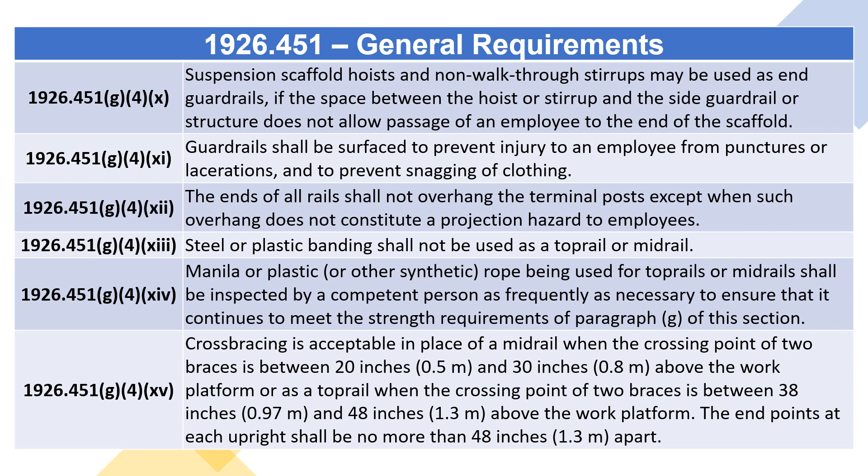1926.451(h): Falling object protection.

1926.451(h)(1): In addition to wearing hard hats, each employee on a scaffold shall be provided with additional protection from falling hand tools, debris, and other small objects through the installation of toe boards, screens, or guardrail systems, or through the erection of debris nets, catch platforms, or canopy structures that contain or deflect the falling objects.

When the falling objects are too large, heavy, or massive to be contained or deflected by any of the above listed measures, the employer shall place such potential falling objects away from the edge of the surface from which they could fall and shall secure those materials as necessary to prevent their falling.

1926.451(h)(2): Where there is a danger of tools, materials, or equipment falling from a scaffold and striking employees below, the following provisions apply.

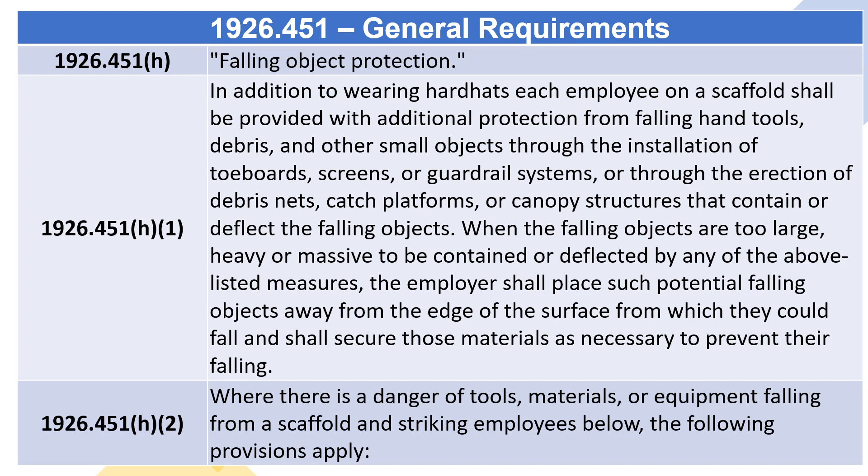1926.451(h)(2)(i) through (h)(2): The area below the scaffold to which objects can fall shall be barricaded, and employees shall not be permitted to enter the hazard area, or a toe board shall be erected along the edge of platforms more than 10 feet (3.1 meters) above lower levels for a distance sufficient to protect employees below, except on float or ship scaffolds, where an edging of 3/4 by 1 1/2 inch (2 by 4 centimeters) wood or equivalent may be used in lieu of toe boards.

Where tools, materials, or equipment are piled to a height higher than the top edge of the toe board, paneling or screening extending from the toe board or platform to the top of the guardrail shall be erected for a distance sufficient to protect employees below, or a guardrail system shall be installed with openings small enough to prevent passage of potential falling objects, or a canopy structure, debris net, or catch platform strong enough to withstand the impact forces of the potential falling objects shall be erected over the employees below.

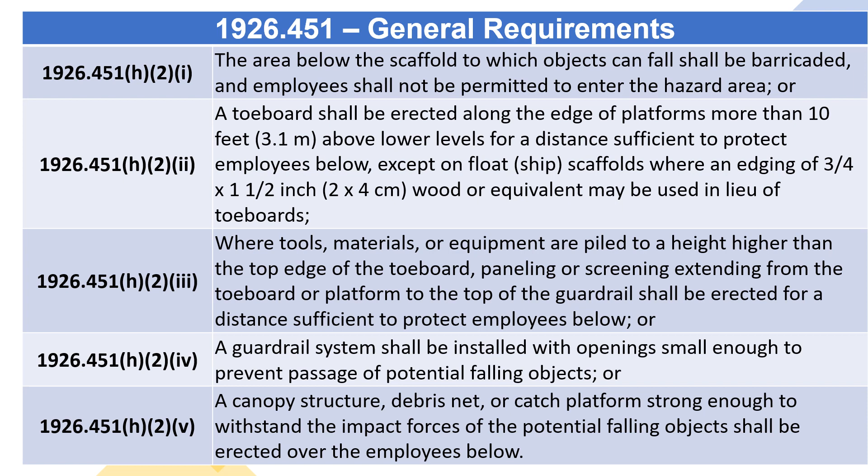1926.451(h)(3): Canopies, when used for falling object protection, shall comply with the following criteria. 1926.451(h)(3)(i) through (h)(3): Canopies shall be installed between the falling object hazard and the employees.

When canopies are used on suspension scaffolds for falling object protection, the scaffold shall be equipped with additional independent support lines equal in number to the number of points supported, and equivalent in strength to the strength of the suspension ropes. Independent support lines and suspension ropes shall not be attached to the same points of anchorage.

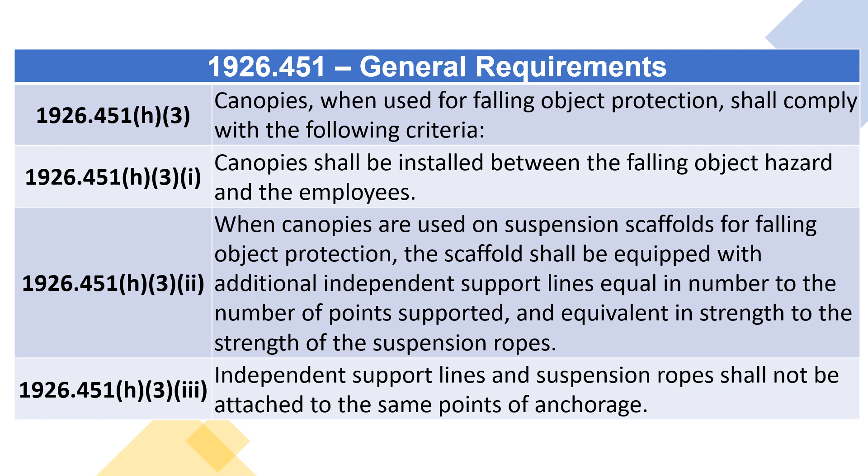1926.451(h)(4): Where used, toe boards shall be (h)(4)(i) capable of withstanding, without failure, a force of at least 50 pounds (222 N), applied in any downward or horizontal direction at any point along the toe board. Toe boards built in accordance with Appendix A to this subpart will be deemed to meet this requirement. And,

1926.451(h)(4)(ii): at least 3 1/2 inches (9 centimeters) high from the top edge of the toe board to the level of the walking/working surface. Toe boards shall be securely fastened in place at the outermost edge of the platform and have not more than 1/4 inch (0.7 centimeters) clearance above the walking/working surface. Toe boards shall be solid or with openings not over 1 inch (2.5 centimeters) in the greatest dimension.